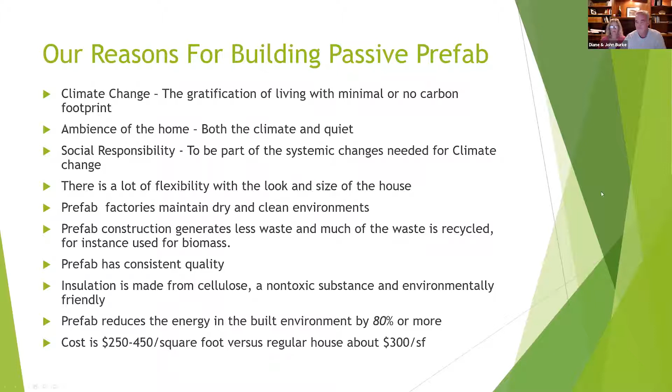The obstacles that we had to make this house, and that's why it took 10 years, the biggest part was finding a property. We wanted to find a property that didn't have a grand, perfect house that was brand new. We needed a house that was old, that we didn't mind knocking down. And we also wanted property so that we could build an organic farm and have that part of the whole thing.

And the next obstacle was really doing a lot of research on different prefab housing companies. There are quite a few of them now, a lot in New England, and that took quite some time also.

And lastly, what we're going through now is trying to get a variance in Middletown and getting the permits and all of that stuff. We're trying to live in the existing house and build the house and then just move over, rather than move out of here, knock down the house, rent a house and all that. It's causing a little bit of a problem also and slowing us down. But those are basically the major obstacles.

So those are our goals. How do we want to achieve them? There's a couple ways. The big way is to minimize thermal bridges. That's basically how heat wants to move. And we know the laws of thermodynamics. Heat will seek cold. So in the winter, the heat's going to escape from your house. In the summer, the heat's going to get into your house. And so minimizing thermal bridges will keep that to a minimum. Insulation is going to be really thick.

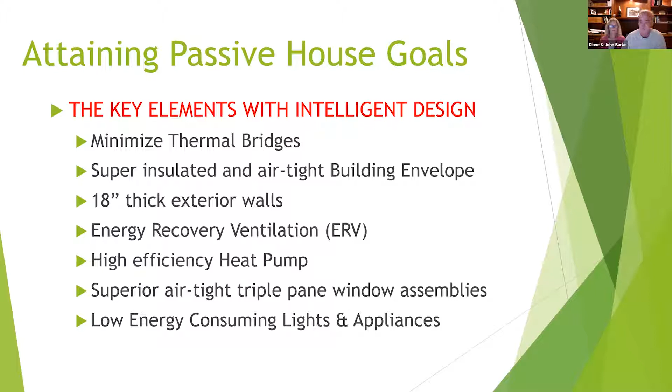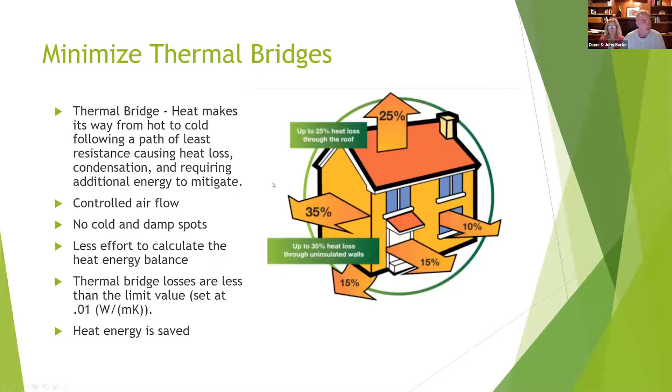Or maybe these people just went to Florida for the winter. I don't know.

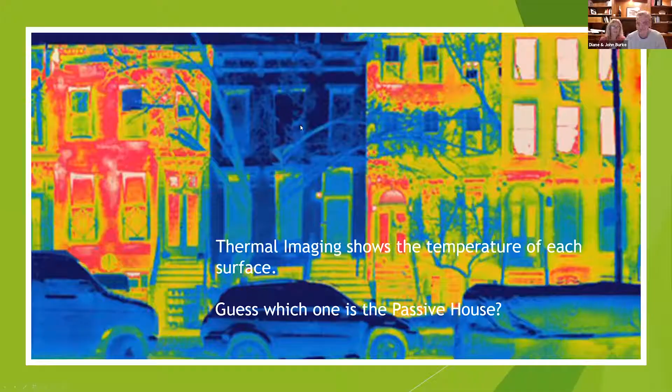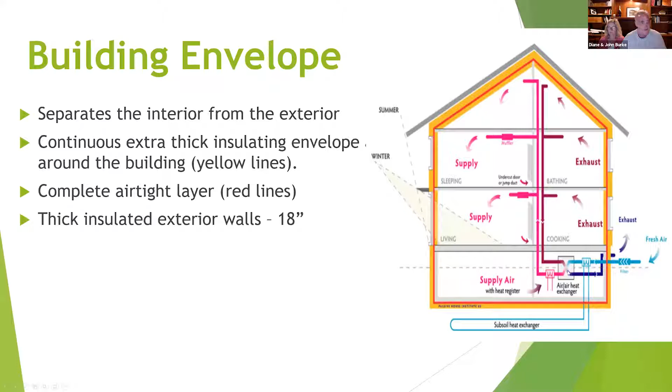So the building envelope. Here, the orange area is the insulation, which I mentioned is 3 times as thick as a normal house everywhere. And the little red line going throughout the whole thing is the thermal barrier. It's an airtight barrier, so it's like encasing the whole house in a balloon. So the only way air is going to get in and out of the house is where we want it to, through the heat exchanger. So it's a really efficient combination of using an ERV with the thermal barrier.

As we were getting into this stuff, we kept being bombarded by all these buzzwords, R values, ACH, Pascals, and we didn't know what they were. Google helped us a lot, but we'll share some of those with you. R values are basically talking about thermal resistance. It's how easily or difficultly heat will be transferred through a material. The higher the R value, the better insulator that material is.

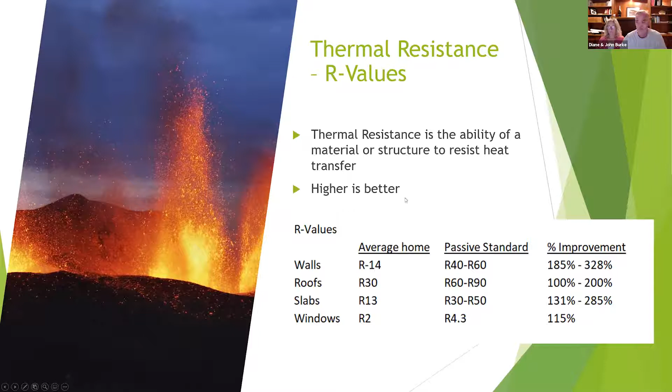For an average house, here's the R values for the walls, roofs, foundation, and windows. And then the passive standard is here in the middle. The percent improvement is 100 to 300% better for the passive house. So that's a big step up. And then this is even bigger. The blower door test: we want the house to be airtight, so all the air is coming in and out through the ERV only.

And the way they do that, and here's another buzzword, is to achieve the passive house standard of 0.6 ACH at 50 Pa. Well, what the heck is that? ACH is air changes per hour, and 50 pascals is a measure of pressure. They put this device on the door of the house with everything else closed, the fan blows air into the house, and the device measures the pressure within the house. They want to get the pressure to about 50 pascals, which is not very much, 0.007 pounds per square inch.

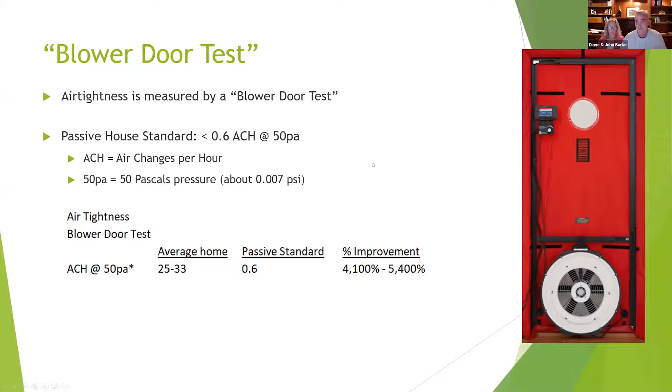Once that thing's going, the average house will have about 25 to 33 air changes per hour. So that's quite a bit. The passive house standard is less than 1, 0.6. So that's about a 4,000 to 5,000% improvement over the average house. So that's a big deal. And combining that with the ERV works great.

So here's how the energy recovery ventilation system works. Basically, in the winter, we've got warm air in the house and cold air outside, but the air in the house is stale and we'd like to get fresh air. If we bring the cold air into the house, it's going to cool off the house unless we put it through a heat exchanger.

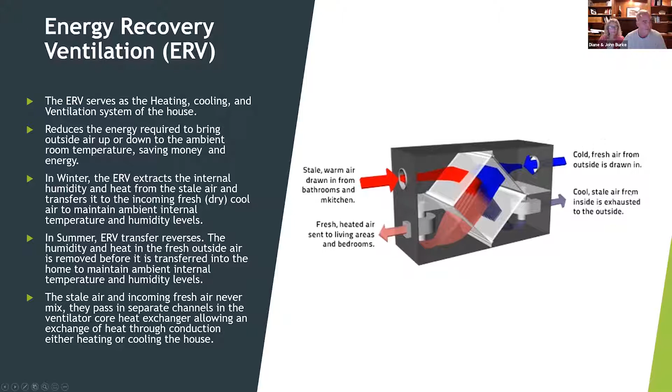What happens here is the warm air goes through the heat exchanger, heating up the cool air as it comes into the house. So it recaptures about 85% of the heat. And then it works the opposite way in the summer. We want to keep the cold in and the heat out, but we want to get fresh air, and it works the other way. So it's really a beautiful system.

The windows are also a big part of the passive house. And as you can see, it's a triple pane. So normally windows have 2 panes, so you have that one area of insulation with the air between. But with triple pane, you get twice as much insulation. And then how it's built, so bulky, it really keeps the thermal bridge closed from escaping from the windows.

The other cool thing is because it's so insulated, you really don't hear any noise from the outside. You won't hear traffic or anything. And then the windows operate by both tilting sideways, like perpendicular, and then also up and down. You go like that. Yeah, so both ways. So that's a big part of the passive house.

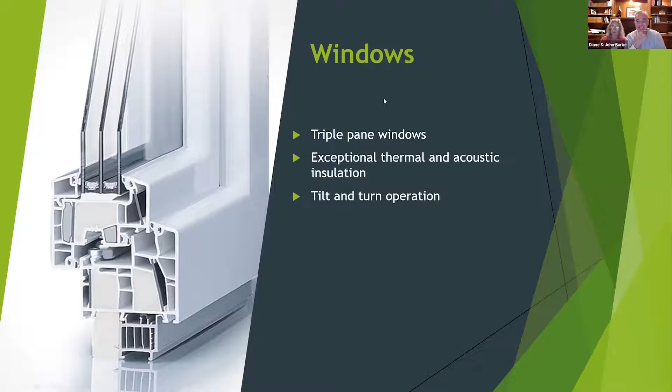And then the goals we had for our design, this is our forever house. So we're 63 years old and we basically want to stay here until we die. So we thought we better have the master bedroom downstairs because you never know what's going to happen. And then also the laundry room is in the mud room, and we wanted a dog wash because we always have 2 crazy dogs that go running with me and they're always muddy. So to make it easy and keep them clean, we have a dog wash.

So these are like different wish lists. We love natural light, so we wanted a lot of windows. So that's totally possible with a passive house. You don't have to be like the Flintstones and just like, you know, darkness. And then we also like a lot of open space instead of really small rooms everywhere. So that was a big part of our decisions and how we designed our house.

Then we also cared about going beyond passive, which it's passive just in the design of the architecture, but solar panels help to, you know, give the energy for the dishwashers and the lights and all that stuff. So, Diane, not everyone may know what passive solar is. You may want to explain that just a little bit. So the passive house, the architecture of the passive house itself creates a situation where you have basically a very low carbon footprint because of the insulation and all of that.

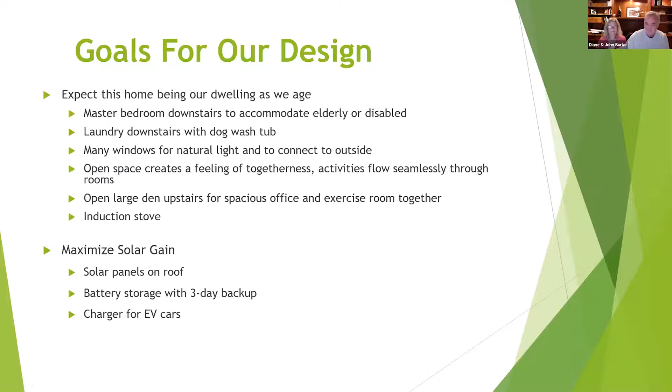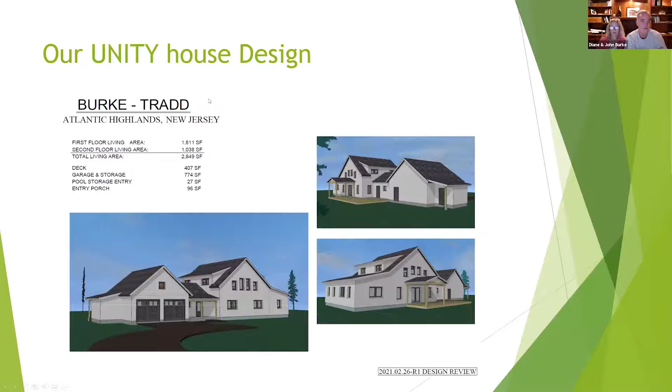So this is a picture of our house. This is what our house will look like. The blueprints are ready. We're submitting it to the town to get permits. So this is it. Except we changed the color to blue, I think. Yeah, it's not going to be white.

Here's a real house that's already built. It's in Lumberton. We went to visit it. The people were so nice. We went in. Again, the ambience, I can't tell you how much, it just feels so good to be in the house. The cleanliness, the air is so clean. And you don't feel like forced air or hot or dry or anything. It's like just perfect air.

Yeah, no dust. Here's another model, a different model, same company, Unity. It's just a different model. There's a new one of this model in Pittstown, New Jersey, that we went to visit.

And so in addition to living in this dwelling, a big part of climate change is also big agriculture, you know, how we're doing agriculture and the footprint of food. You know, we get food from Costa Rica and even California. That's a long way, a big carbon footprint. So we just want to be aligned in as many ways as we can to minimize our carbon footprint.

So we built a big organic garden, and in New Jersey, I've been getting lettuce from March, and now I have new lettuce coming, and I'll have lettuce till after Thanksgiving. So it's a really big growing season to get your own food. We also plan to get some sheep and maybe goats, maybe alpaca. The manure that they produce is so good for the vegetable garden, and also just bringing more life to the land that we have here.

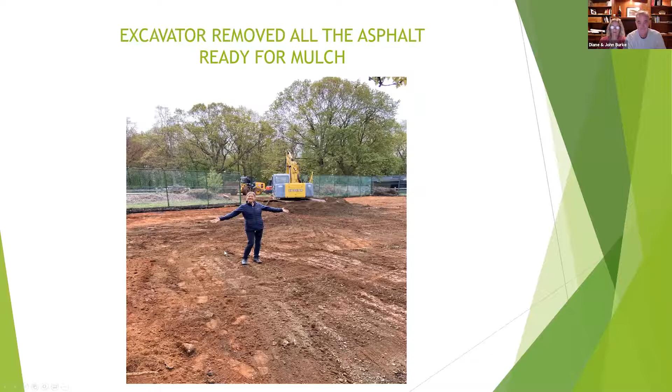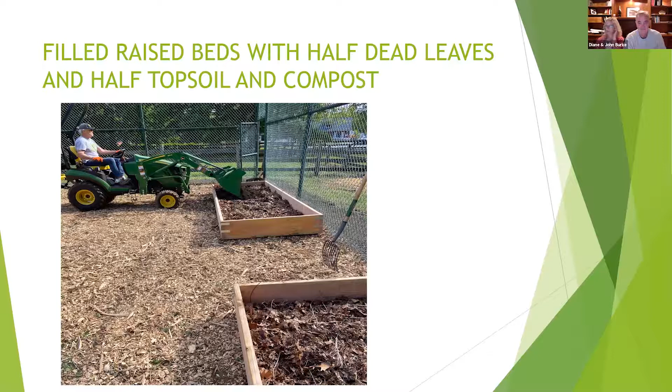So there's the asphalt down. We put topsoil down and we mulched the whole tennis court. And then John and I built these raised beds. It was COVID, so we had a lot of time on our hands. We built 18 raised beds. We also did the lasagna method with the raised beds, where we put brown leaves, carbon, twigs at the bottom of the raised bed, so it was less topsoil. And then we topped that off with topsoil. So that is a great way to start a garden.

Here are half of the raised beds that we made. And then here's just an example of what happened with the first summer, the abundance and the beauty that we brought back to this dilapidated tennis court. There was no life there. And just with the flowers, pollinators came. We had food, a lot of food, the birds, there were hummingbirds and yellow finches because we had a lot of sunflowers. And then we enjoyed having farm to table meals with friends and family.

And we plan on the other half of the tennis court to put fruit trees in when we remediate the soil there a little bit more, like another year, I would say. We're going to remediate the soil where the asphalt was and then put some fruit trees there.

Do you know how much of your actual food budget came from your garden? Well, I haven't had to go to the produce section of a grocery store since probably June. I grew 200 heads of garlic. We had onions, potatoes, squash, peppers. And I'm pretty good at seeing what I have an abundance of, and I'll just make something with that.

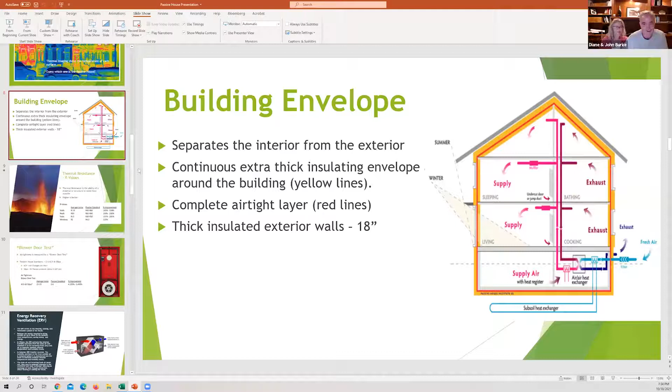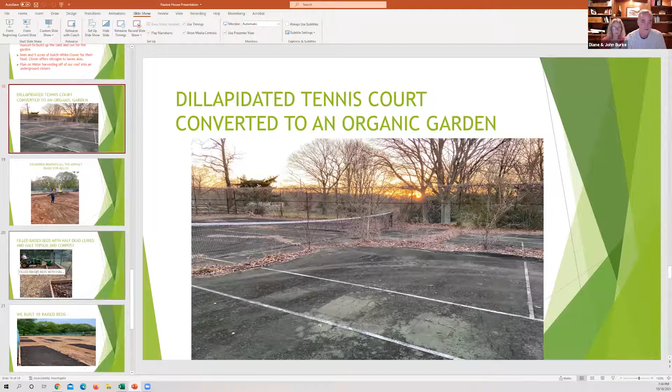Plus, our dogs kind of convinced the groundhogs that existed here when we moved to seek other housing, so they left. But Diane and I were sitting on the patio once enjoying our new house, and like, well, what are we going to do with this ugly tennis court? Sipping a glass of wine, and we said, I know, let's knock it all out, make it a huge garden. It was 60 by 120. Leave the fence, which is 10 feet high, so deer can't jump over it, and it worked great. So we haven't had any animal problems in there, but we have had some insect problems. Yeah. Doesn't keep the insects out.

Someone else, Roshini has a question. Yeah, can you turn on your mic, Roshini? There you go. Hi, my name is pronounced Roshni. Roshni, hi. Hi, how are you?

My question is, I'm very new to the whole idea of passive homes, so I'm learning a lot. I don't know if I understand it 100%, but that's okay. This whole project seems really cool, and what both of you have done is really incredible, especially creating the garden and everything. I have 2 questions. One question is, what do you think have been the biggest challenges in your advocacy for passive homes? And also, how does one find the appropriate property to build a passive home in the first place? I don't know if those are good questions, but that's just what came to my mind.

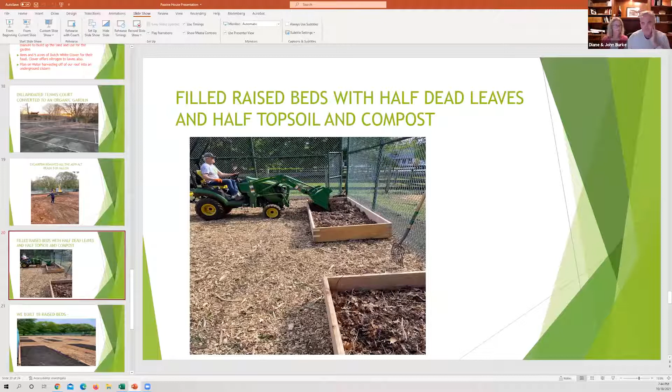Great. There were a series of questions still in the chat that I don't think have been answered. The very last one had to do with a note from Roberta. This type of discussion is 40 years old. Why haven't zoning regulations caught up with this? That's an interesting question. I have a partial answer, actually, that a group of people, the 50% by 2030 group, met with Governor Murphy's energy policy advisor. And one of the things she raised with us is that they have been thinking about making energy codes in New Jersey more stringent. And they wanted to know if the municipalities had an appetite for it yet.

I don't know if that's yet happened, but California has. And the consultants that New Jersey uses also are consultants for California. And I think that's behind it. There probably is the same consultant saying, hey, why don't you adopt California high efficiency house building code standards in the New Jersey Uniform Building Code? Because, by the way, all the municipalities adopt that. And I'd like to see it happen, but that's my answer. Do you have any other answers? Why don't all houses do this now?

What was that, Steve? The question is why are we 40 years behind, and why don't we design houses like this now? I mean, my personal opinion is that builders are just busy building. They're not thinking of a new way to build. They're not going back to school. Some professionals have to make credits every year to keep learning, but builders don't have to do that. And they're just trying to keep up with the housing market. And so there isn't a class teaching them that, and homeowners aren't demanding it. So that's what we're trying to push.